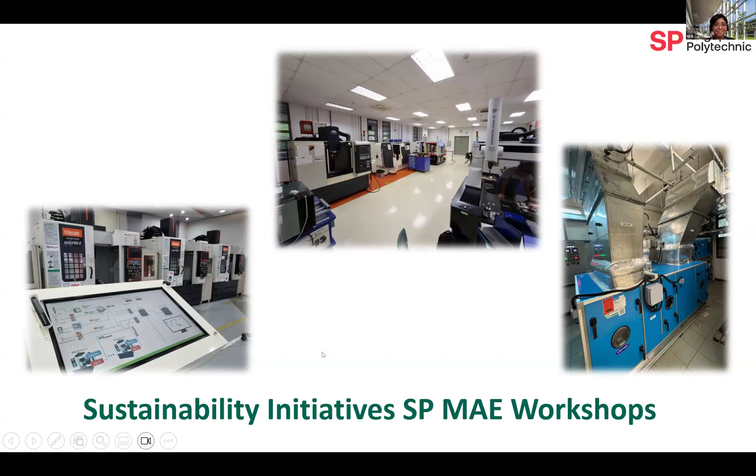Good afternoon everyone, my name is Saw Tun. I'm a senior lecturer from the School of Mechanical and Aeronautical Engineering, Singapore Polytechnic. I also oversee one of our continuing education training CET programs, Specialist Diploma in Air Conditioning and Energy Sustainability. In addition, I have developed short courses on MEP - Mechanical, Electrical, Plumbing - and Building Information Modeling, BIM applications for the built environment sectors. Within MAE School, I lead the Energy and Sustainability Focus Group. Today I'm joined by my colleague and adjunct lecturer, Mr. Ahmad Sulaiman, as we share some of our insights and experience from our MAE sustainability journey at our workshops.

To share our sustainability journey, first of all I would like to highlight what are the key motivations that lead us to embark on this path.

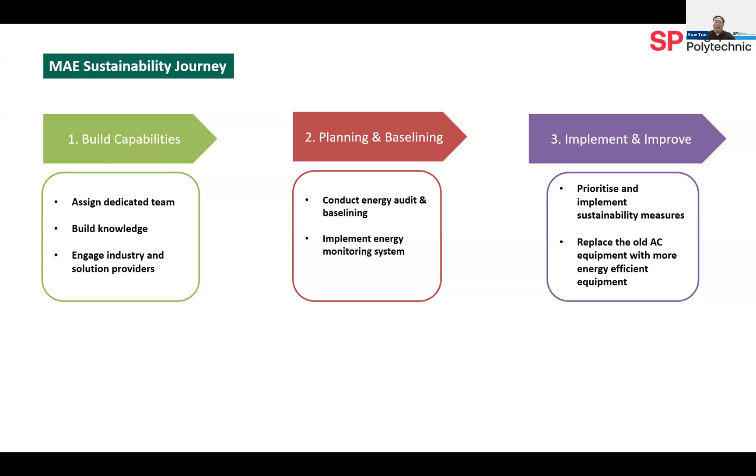Under step 1, build capabilities, with the support of the school management we have carried out 3 key initiatives. We assign a dedicated team to lead our sustainability efforts. We strengthen our internal competencies and capabilities by attending relevant courses and acquiring new knowledge and skills in the area of sustainability. We engage with industry stakeholders and solution providers to stay aligned with the latest industry trends and sustainability solutions.

As part of our phase 2, planning and baselining, we choose to focus on improving the energy performance of our workshops W1411 and W1412B. We conduct the energy audit and try to baseline the energy consumption first. Establishing the energy baseline is the crucial first step before pursuing sustainability improvements. To achieve this, we conducted a level 2 energy audit to analyze energy consumption patterns and identify potential energy saving opportunities.

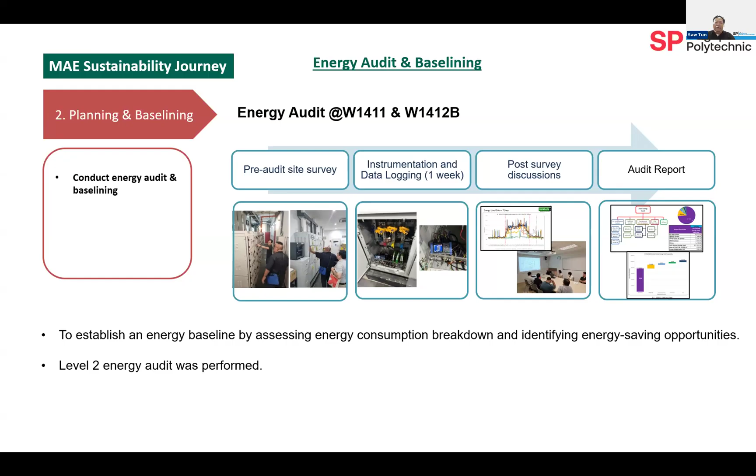The energy audit allowed us to establish the baseline and identify the breakdown of energy consumption. This is our findings from the audit: as expected, air conditioning accounted for the largest share, consuming over 70% of the total energy at the workshops.

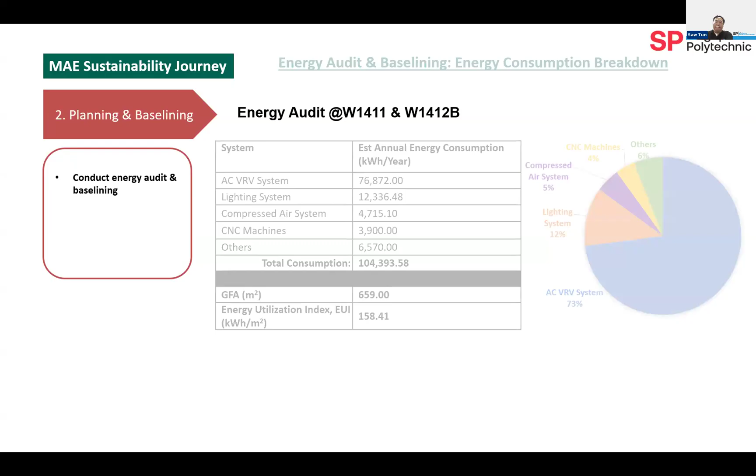Now I would like to analyze a little bit further into the energy consumption data for the AC system. Before analyzing these findings, I would like to highlight the key equation shown here: energy consumption in kilowatt hours is basically energy efficiency in terms of kilowatt per RT, multiplied by cooling load in terms of refrigeration tons, multiplied by the duration in hours. This equation shows that total energy use is determined by two main factors: energy efficiency and cooling load. Understanding this relationship is crucial for identifying effective strategies to reduce energy consumption.

Based on the audit finding of the air conditioning system, we carry out a more detailed analysis to pinpoint the specific areas where energy performance could be improved. We observed that energy efficiency was relatively acceptable for this finding. The energy efficiency of the equipment has 0.964 kilowatt per RT.

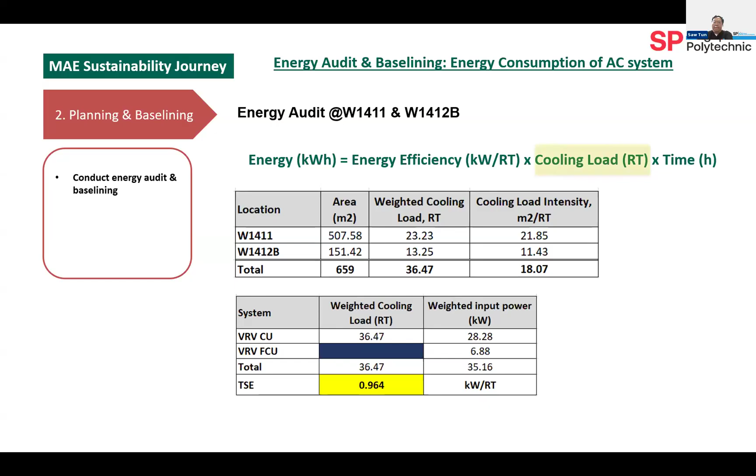The audit identifies several potential energy saving opportunities. This is the potential opportunity that we can save energy, as summarized in the table. Through behavioral and operational adjustment, we aim to reduce the air conditioning energy consumption by up to 22.49%.

The audit also recommended replacing existing lighting with energy efficient lighting fixtures to reduce energy consumption from lighting as well. Additionally, operational improvements in the compressed air systems are expected to contribute further energy saving. In total, the projected energy saving across these main facility systems amounts to approximately 29%. This is our finding and projected opportunity.

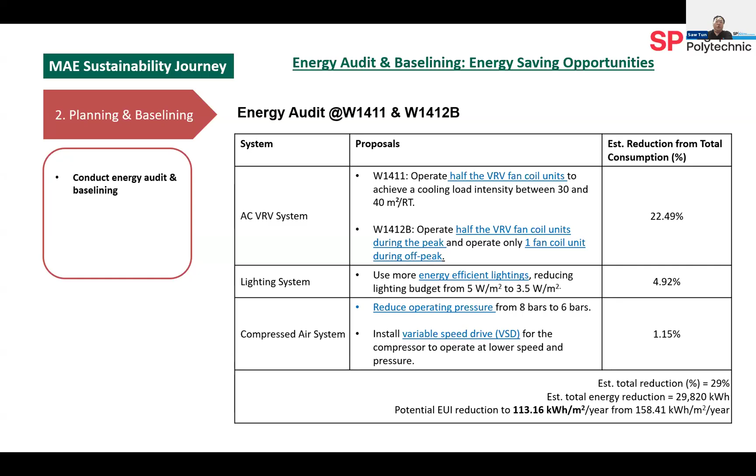Another initiative that we did, in addition to conducting the energy audit, was implementing the energy monitoring system in the workshops. This system enabled us to collect energy data for evaluating the effectiveness of energy efficiency measures and to continuously monitor the performance of key systems.

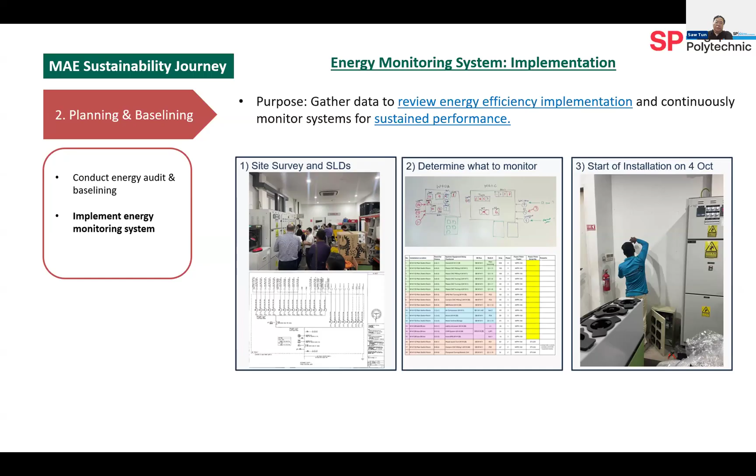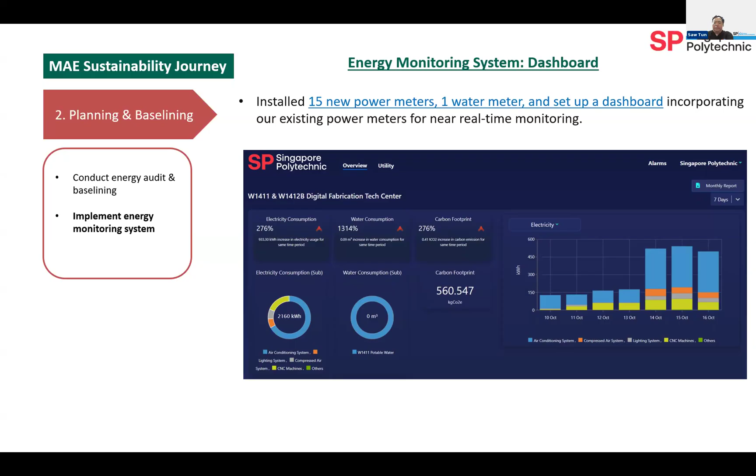Now I'd like to move on to phase 3, which is implement and improve. In this phase, we prioritize and implement the sustainability measures as recommended by the audit, based on the audit findings and recommendations.

We select two systems. The first one for the AC systems, for W1411, we try to operate half of the VRV fan coil units to stretch our cooling load intensity from 18 meters square per RT to around 30 to 40 meters square per RT.

Similarly, for W1412B, we also only operate half of the VRV fan coil units during peak periods and only one fan coil unit during off-peak periods. For the compressed air system, we changed the operational pressure from 8 bars to 6 bars.

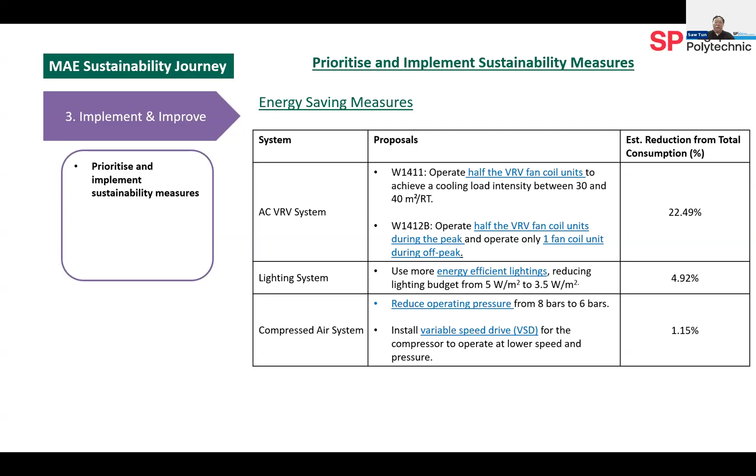Next slide, I would like to share our result of the findings for the past 3 months. Since January 2025, we have implemented these energy-saving measures in our workshops. By comparing 3 months data before and after the implementation, we observe a...

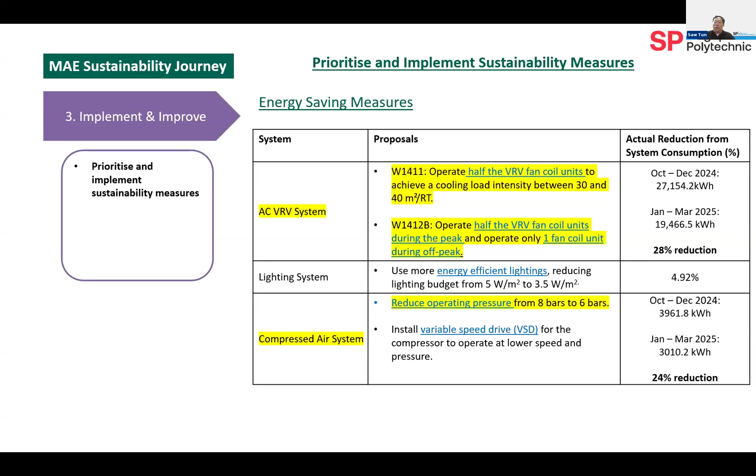28% reduction in energy consumption for the air conditioning systems, achieved through behavioral and operational changes. Similarly, the compressed air system saw 24% reduction by lowering the operation pressure from 8 bars to 6 bars. Overall, for the 3 months, we managed to save more than 8,600 kilowatt hours of energy.

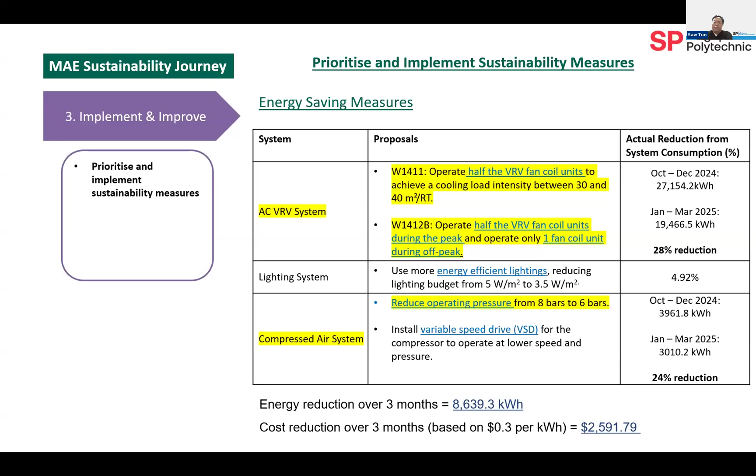I would also like to share another energy-saving initiative that we carried out in our refrigeration and air conditioning lab. We replaced our old air handling systems with a new energy efficient system. This upgrade to the airside system significantly improved the lab's energy performance.

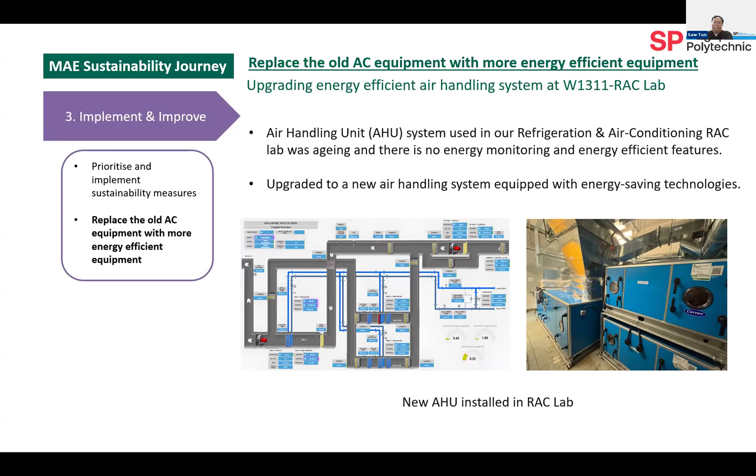In our case, for this upgrade, only the airside system is upgraded and there is no change to the water side of the air conditioning system. As a result, overall system efficiency actually did not improve. In fact, it has declined.

This reinforces an important point here: when evaluating the energy consumption of AC systems, we must consider not only equipment efficiency, but also cooling load.

By applying the right control strategies, we successfully reduced the cooling load from 20 RT to 3.5 RT here. This resulted in a substantial drop in energy consumption by about 20 kilowatt hours per day, achieving over 16 to 17% energy saving from airside alone.

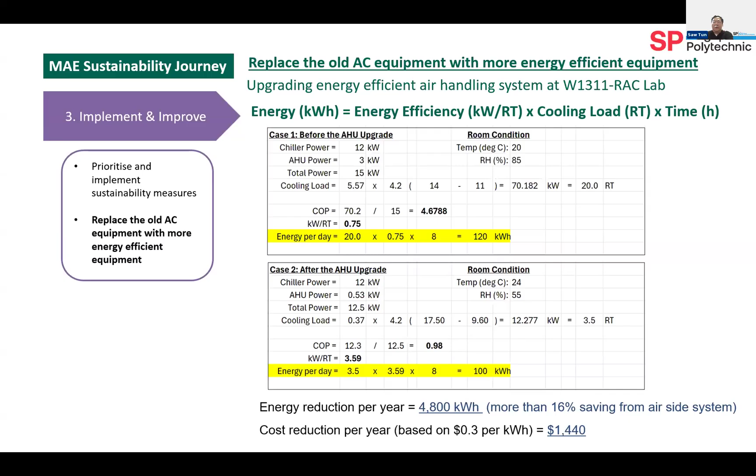In summary, the airside system upgrade has resulted in over 16% of energy saving.

There is also a strong potential for further reductions on the water side, specifically through the use of variable speed drives for the chill water pumps, condenser water pumps, and cooling towers. With this additional enhancement, we aim to achieve total energy saving of over 40% for this lab in future.

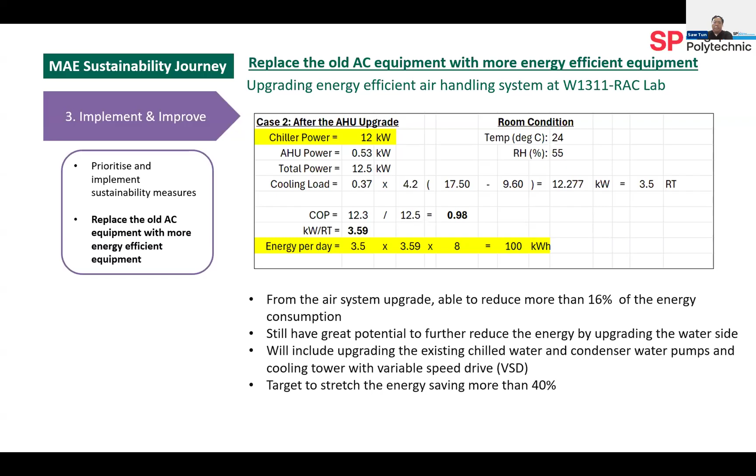Now, I would like to take a moment to reflect on why we embark on a sustainability journey. First and foremost, as educators, we strongly believe it is our responsibility to equip our students and learners with the skills, knowledge, and mindsets necessary to thrive in a rapidly evolving world where sustainability is no longer optional but essential. At the same time, we recognize the importance of working hand in hand with our industry collaborators, navigating their sustainability transitions together, sharing knowledge, co-developing solutions, and learning together.

Now I would like to share our CET courses available for industry adult learners in the areas of sustainability. The first one, for which I'm also course manager, is the Specialist Diploma in Air Conditioning and Energy Sustainability. It is a one-year program targeted at industry learners from the built environment industry. It has two PDC modules, post-diploma certificates, and under each certificate we have two modules each.

For example, the first PDC, Air Conditioning and Energy Sustainability, has two modules: Air Conditioning Systems and Green Mark, and Energy Sustainability. The second PDC is about Energy Modeling and Management. Under this PDC we have two modules as well: Integrated Building Management Systems, and Information and Energy Modeling of Facility.

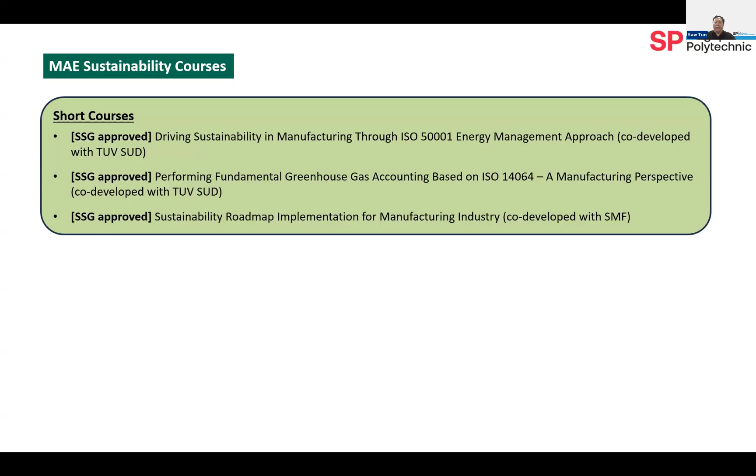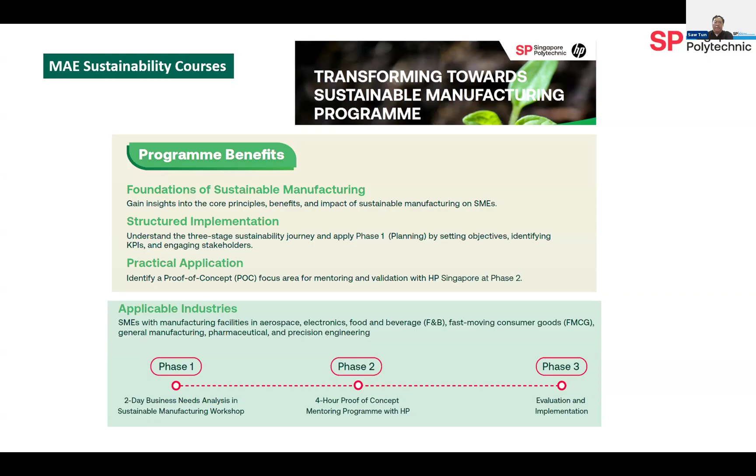With that, I would like to end my presentation. Now I would like to pass on to my colleague, Mr. Ahmad Sulaiman.

He is the adjunct lecturer with us at the School of Mechanical and Aeronautical Engineering, Singapore Polytechnic. He is a practicing EOA, BCA practicing EOA, and has over 40 years of experience in the field of air conditioning and energy auditing, and holds 2 patents on data analytics. He has very rich experience in the field of energy monitoring and air conditioning. He will be sharing his insights and experience collected over the 40 years.

Mr. Ahmad, please. Yeah, okay. Hi, my name is Ahmad. I think I don't have to introduce myself, Saw Tun has already introduced me, I think that's more than enough. Okay, Saw Tun, next.

So basically, over the years, what we have learned is when we started off with the energy saving program way back in 2000, there was a lot of misconception. One of the issues we faced was whenever a building owner wanted to save energy, they always looked for the electrical engineer, which is quite common, because you want to save energy so you go to the electrical engineers. But in the initial years, when we did all these audits, the electrical engineers basically looked at the end result. What to do, they may not have any idea, because the power usage is the result of certain actions that need to be taken. Because of this misconception, there was a lot of failure in the initial start. As a result, a lot of people do not really believe energy saving could be done, because everybody thought they'd tried it and the result never showed. As a result, it seemed like this industry is like BS, you know. So this is the issue that we first faced when we started off in early 2000.

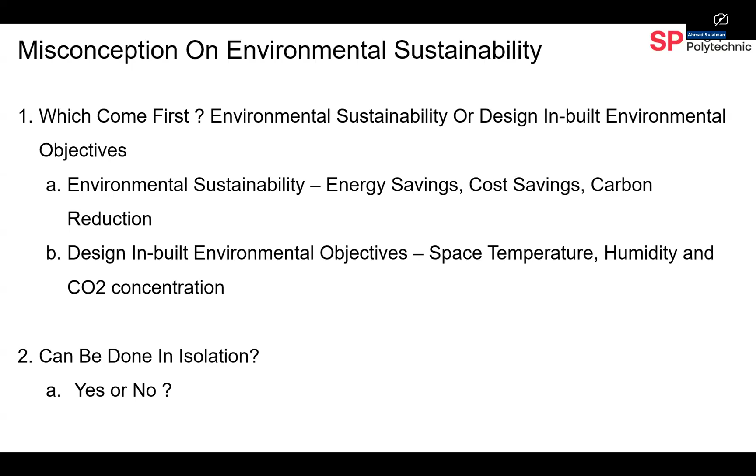So that's why, like what Saw Tun said, it's very important for us when we want to do any energy saving initiative to prioritize correctly. Make sure you get the built environment correct, and then you optimize your system.

So then people were saying everybody was looking at efficiency, like what Saw Tun was saying just now. When we do our so-called audit, we are not totally focused on energy saving first. We are looking at how the condition within the space is, whether we are getting the correct condition, or are we actually using a lot of energy.

In that example that Saw Tun told you earlier, the saving is actually reducing the amount of cooling load that you are using, rather than the energy saving itself.

One of the things we found out was because of our objective to cool the space within a certain temperature and RH, we actually overcooled the space. And because you are overcooling the space, as a result, during the audit we found that...

Our efficiency is good, but then our condition within the space is not what we want. I mean, we have the temperature, but the RH was not the one we wanted. The RH was a bit wet, about 70-75%, whereby we want it to be below 70% so that we can protect the equipment.

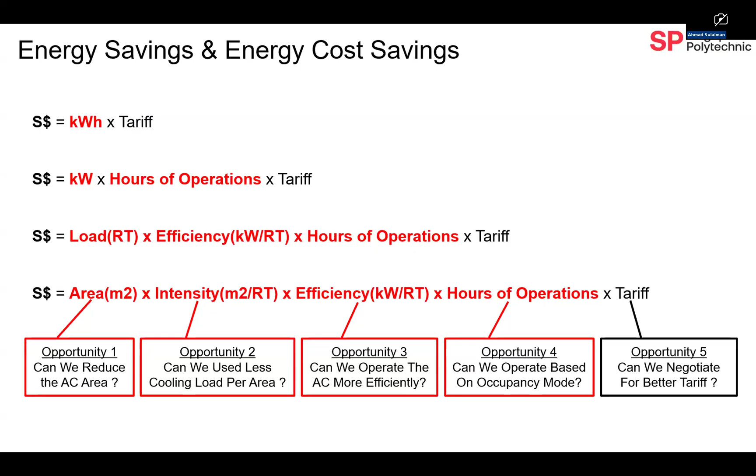Okay, so again, this is just a repeat - the concept of energy saving. At the end of the day, when we talk about energy saving, I touched earlier that when we started off in the energy saving industry way back in 2000, we always had a lot of failure. Mechanical engineers, electrical engineers can come up with a lot of computation saying you save this, you save that.

But the most important thing, after all the computation is done, we need to see the real saving. That's why one of the things I always ask my team is: whatever computation you have done, eventually, your computation can be okay or not okay until the finance director feels that he has saved energy - meaning the amount of money he pays for utilities that month reduced. If you are doing like the tengah issue whereby people say you save energy, but then how come I still pay double?

That means in terms of your accuracy, in terms of your implementation, something is not right. So the final litmus test will be when the group financial director, or the housewife, can come to you and say thank you - yes, I paid lesser utility for this month or this year. That will be the one that really tests your calculation, your initiative, whether you really did it or not.

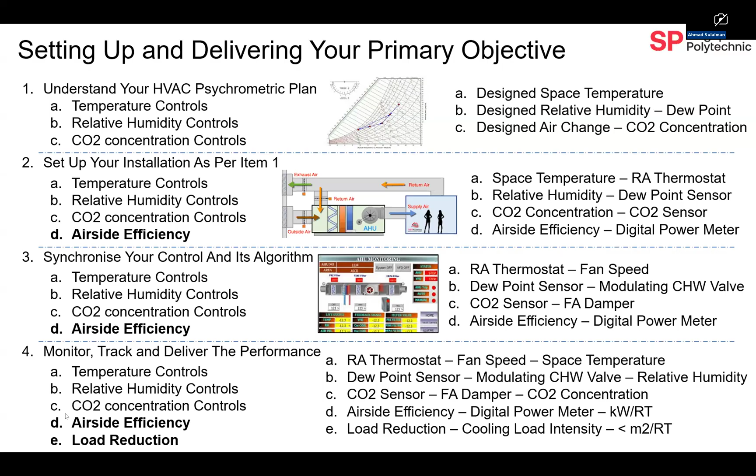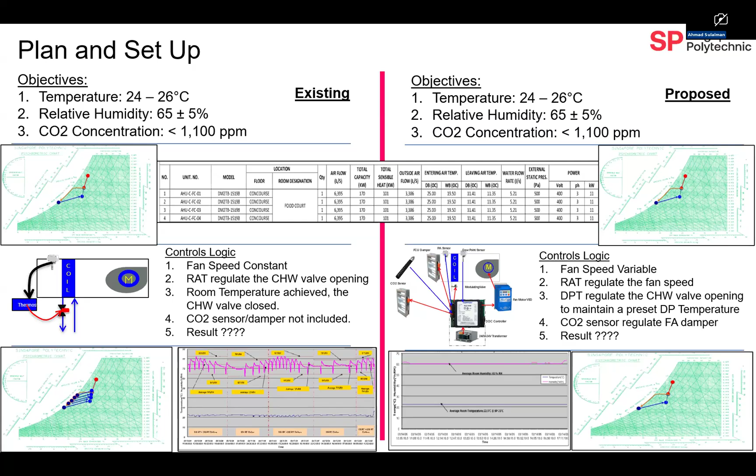And then once you have your humidity, then we talk about the last objective, which is the airside efficiency. Once you get your condition in the space right, then we talk about efficiency and how do you improve your energy usage, energy efficiency. So that's why if your setup is on the left, you can see that as your load comes down, your efficiency actually becomes even worse.

Remember, the air conditioning that was designed for your room is always designed at 100%. But the moment your room has already cooled down to about 24 degrees, 26 degrees, the one that you want, your cooling load actually shrinks. But the size of the unit never shrinks because the physical size of the unit still remains the same. But as the cooling load reduces, your power needs to reduce at the same time.

And that's why we say you need to link the power use against your cooling load so that you can maintain your efficiency, because efficiency is based on kilowatt per ton, right? Kilowatt is your power, ton is your cooling load.

So that's why if you do the setup on the right side, because we put all our AHUs on VSDs, now we have EC fan, even better. But the relationship of power is still the same. So as your load reduces, your power also must reduce together. This is the importance of synchronizing your control.

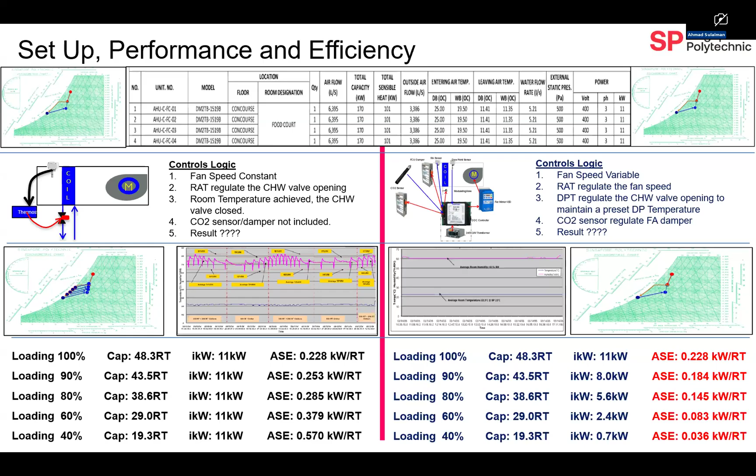So, how do we operate this kind of operation? If you want to, because once you get the result, that's not the end of it.

Now, because all our payback or return on investment is measured in terms of annual, that means 12 months. So in order for you to operate, because we already handle the space condition, the operator doesn't have to worry about meeting the space condition. Then you get them onto the next level, which is the energy cost or the efficiency bandwagon.

So we need to teach all these technicians how to look at their cooling load. You need to understand, while we calculate the load based on annual return, we've got to backtrack into daily cooling load and daily efficiency. And then after daily, you go to hourly.

So the technician, with the digitization of this SI system, they actually are more skillful, in the sense that now you have data that comes back to you on your operation. So they actually, through training, improve the performance even better than design. If you can operate on a daily basis at certain efficiency and certain cooling load, the final litmus test becomes very easy because you handle the day-to-day operation very well. You don't have to worry about the year because you are maintaining.